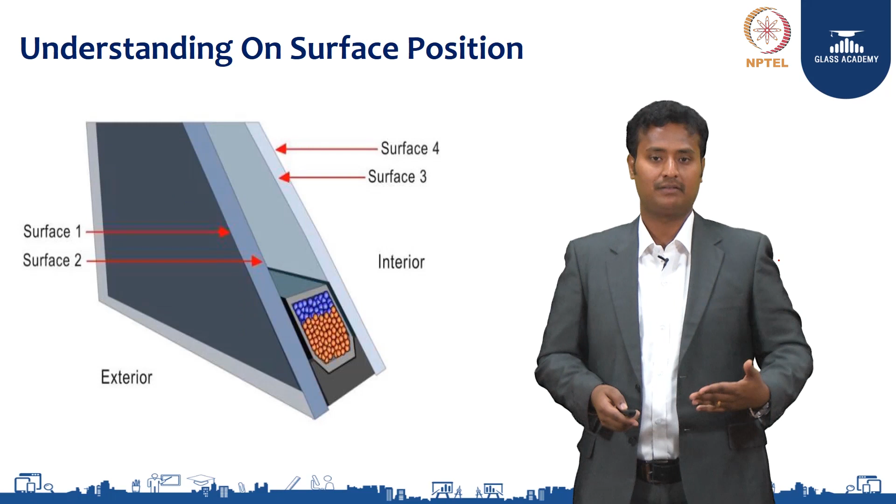So let us move on to this IGU part. Having said that, DGU plays a vital role in terms of acoustics, less condensation, aesthetics, energy conservation, and so on performance-wise. How does it help application-wise? Each part plays a major, essential, vital role in the IGU process.

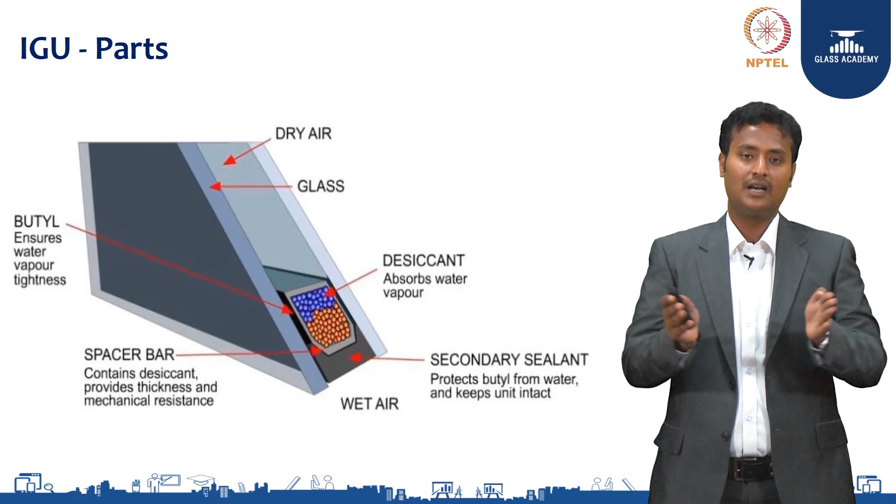Glass always has superiority for the IGU process, but even the other parts are even more essential for the IGU process. Which means you take two glasses hermetically sealed with the help of primary and secondary sealant, and you have an aluminum spacer which gives a space like 6mm, 12mm air gap, or 16mm air gap with 6mm glass. So basically it's a double glaze unit, glazed between the two panels, and either you can apply dry air or inert gas like argon, xenon, krypton, gases which give high thermal performance, can be inserted inside the DGU. At the time of processing you can do that.

And the aluminum channel, it's a hollow aluminum channel, has a desiccant. This desiccant gives a lot of performance effect to the glass. If the desiccant fails, your DGU is going to fail over a period of time, within a certain period.

For example, it's like a condensation effect, like a refrigeration system - nowadays in all shopping complexes, the refrigeration systems you see, there's a glass pane and inside there's refrigeration. Outside the temperature is like 30 degrees centigrade, inside will be like minus 20 degrees centigrade or less. So you get a condensation effect. In order to avoid the condensation effect...

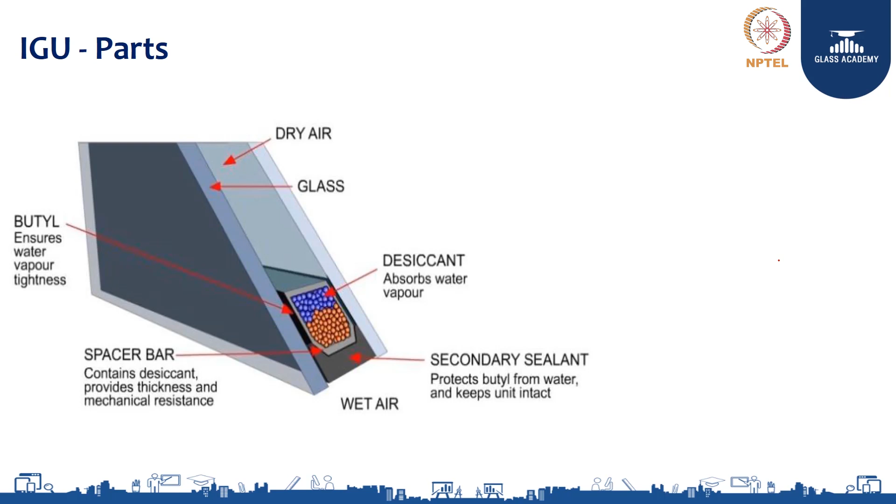This desiccant helps us to view the glass, view the product inside. It absorbs the water moisture at any point of time. So a single glazing has a U value of 5.8 watts per meter square Kelvin, whereas if you use a double glaze unit like 6mm, 12mm air gap, and 6mm, you will get a U value of 2.8. It can even be reduced further with the help of solar reflective coated glasses if you use them.

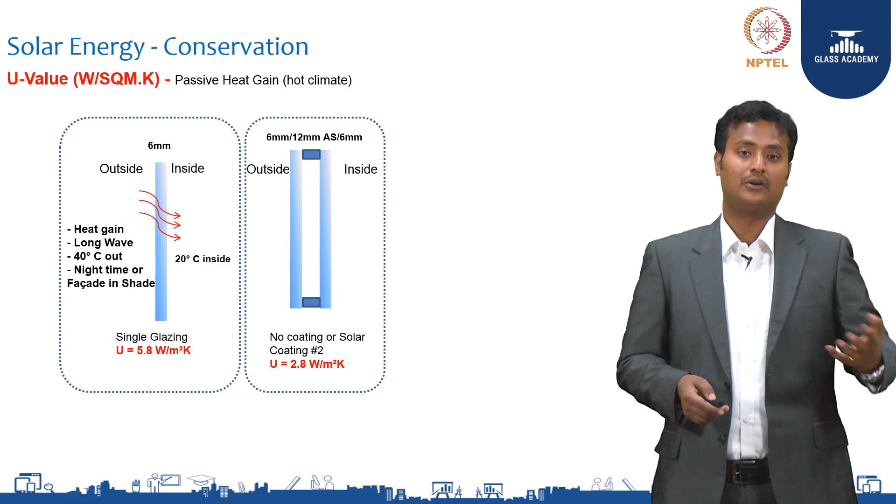Furthermore, the U value reduction you can get. For example, if you use triple silver or double silver coated glasses, you can get further U value reduction. The more the reduction of U value, which is 1.5 watts per meter square Kelvin, the more performance of the glass you will have.

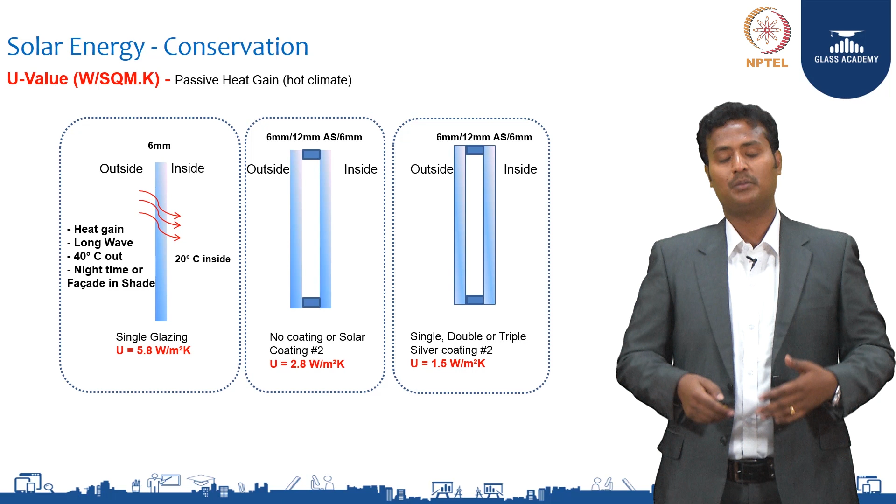The single pane has a U value of 5.8 watts per meter square Kelvin. Double silver, for example, if you take it, the U value of the double glaze unit is going to be 1.5 watts per meter square Kelvin. Thereby you have a profound energy saving you can get.

With single glass, you see 32 degrees centigrade allowed inside. If you use a double glaze without any solar control glasses, only a single clear glass, you will get a reduction of 6 degrees, down to 26 degrees centigrade. Whereas if you use 1.2 watts per meter square Kelvin as a double coated solar control thermal insulated coating, you get a reduction of 23 degrees centigrade, whereas it was 32. So you will get a considerable heat reduction inside the building.

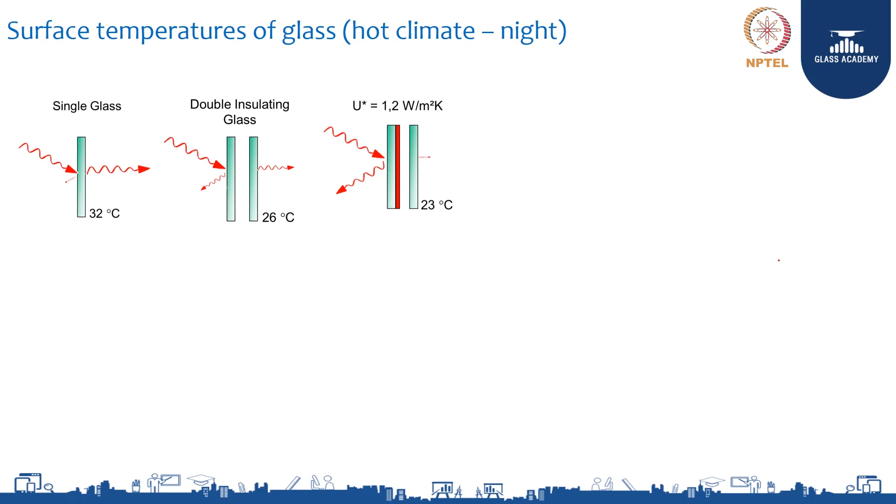So thereby you can save energy. This is the tabulation which we have talked about. So, benefits of insulating glasses.

First and primarily, it is aesthetically appealing in a facade. Nowadays, wherever you go in a metropolitan city, all the IT complexes are facade buildings. So basically you can see the amount of glass being used widely. The construction industry has been widely booming across the globe, so the glass occupies the most space, thereby you get the aesthetic feeling.

Earlier, ACP occupied that space. Nowadays, glass has occupied the space of the building. This is the facade, you get an aesthetic and improved comfort.

If you use solar and triple silver thermal insulated coating glasses, if you use double glazed, you can have great inside comfort. People can go and sit near the glasses, whereas if you use single pane glasses, you cannot go and sit near the glass.

You can achieve less condensation. We talked about the desiccant, which plays a vital role in absorbing the water moisture inside the DGU. If anything happens, it absorbs, so it will give you transparency as well as a less condensation effect. I would say there is no condensation effect.

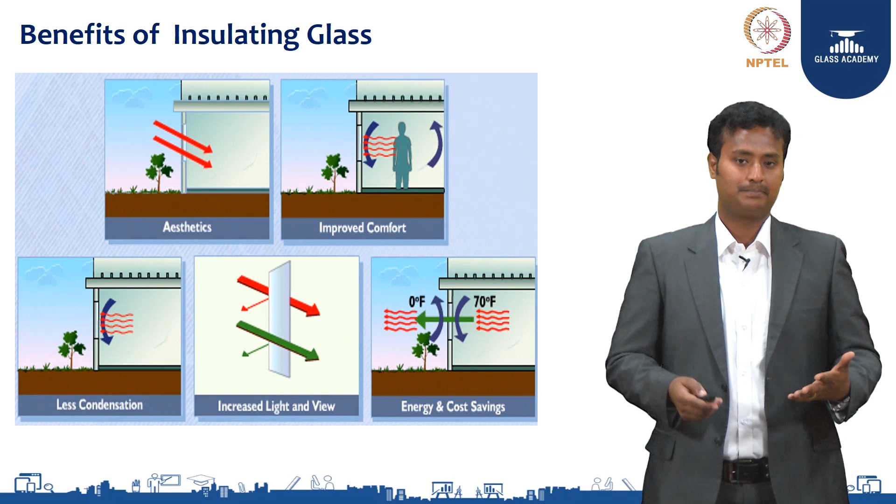Having said that, energy saving is the most important factor nowadays. Energy is a factor for all economical growth, so the amount of carbon emission has to reduce. The glass usage will give you a payback in a period of 2 years, thereby you can get a considerable reduction of your energy bills. So that's energy conservation we talked about.

If you want to use air conditioning in summer, the considerable heat coming inside will be reflected and stopped. It will not allow heat to penetrate into the building. So the glass will protect against heat coming from outside to inside, thereby giving you greater energy saving.

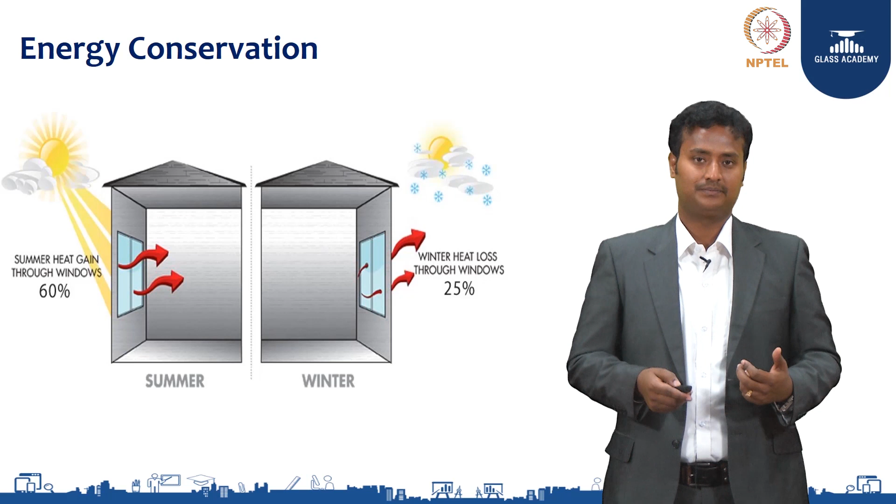In winter as well, the inside heat would not go away, it will retain that heat. Winter needs heat, so whatever thermal heat is produced inside, like from bulbs, laptops, other appliances, or body heat, that thermal heat will not escape through this glass. So you don't need heating, whereas in India we don't have heating technology like other European countries do, where if the room is colder they'll heat it. So again, we don't want to invest in heating the building when winter is on.

And perfect transparency is most wanted, people want to see outside. Nowadays, people using curtains, blinds, louvers, or any obstacles to viewing outside have a problem with this.

So you can choose appropriate glass, thereby you can see from inside to outside, and from outside to inside it can also select appropriate glass selections.

Acoustic performance, yes, you can definitely achieve this, because if you use a laminated glass with a DGU, you'll have more performance. With a normal 4+4, you'll have a decibel reduction from 70 decibels outside to 40 decibels inside. If you use a double glaze, 30 decibels has been completely reduced. It's quite an effective change on acoustic performance.

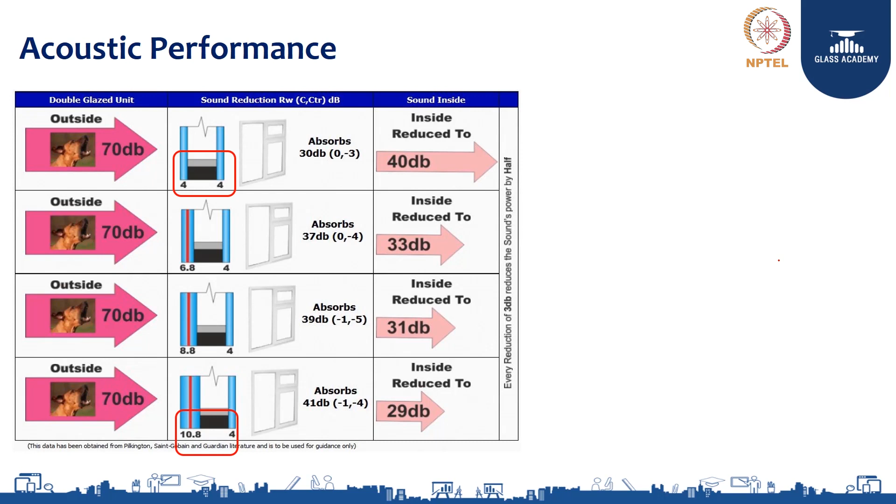Likewise, the more layers you increase of laminated panes, or the thickness of the DGU, you'll have a respective acoustic performance. It's widely used in hospitals and airports, where at take-off you'll have a huge blowing sound from the plane.

So the occupant will get disturbed, it's not a comfortable category, so you will not have a comfortable journey. In order to protect against that, the double glaze unit with laminated glass would ideally be helpful for such traffic areas.

It can be used in hospitals, where you want patients to be very calm inside. So you can use such a product to protect them from the outside.

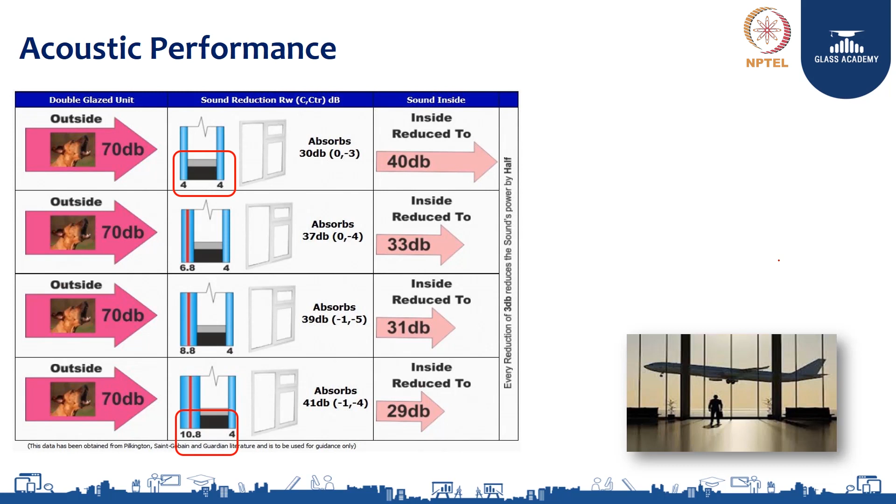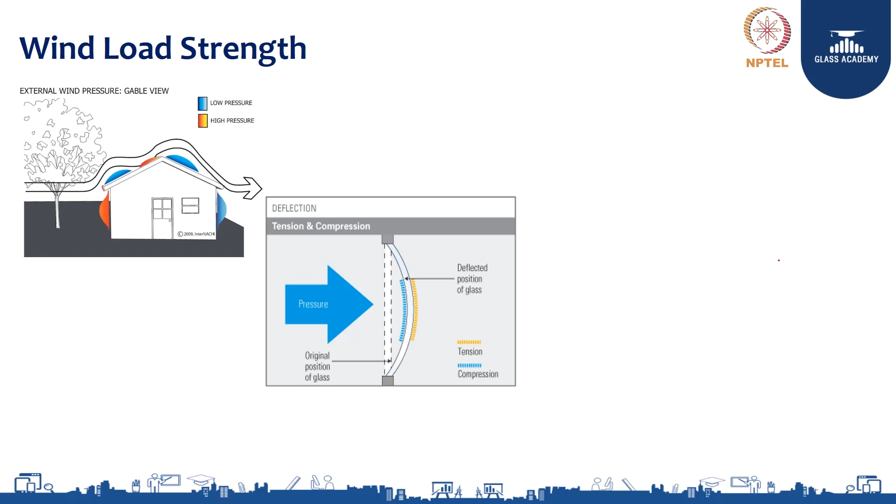Regarding wind load, yes, the glass will deflect since it's mechanically sealed. This deflection is allowed and it will return to its original position if you use a double glaze unit.

Application of insulating units includes architectural glass, facade, and residential application. You get a wider view through the glass. Earlier it was completely masonry and cement, but now you can see what is happening around through the glass. So it's widely used in facade IGUs.

You can do a number of colorings, either through ceramic, digital printing, or laminated PVB can be changed. So you can have greater color performance on your building, which you can choose with the help of IGUs.

Any shape, not only rectangular or square, can be done in any shape of the building, using the double glaze unit. So these are the common applications.

Skylight allows more light to pass from the top side to inside, so you need not use any artificial lighting inside. Nowadays it's very famous in India and European countries, they are far ahead in using such applications for skylights.

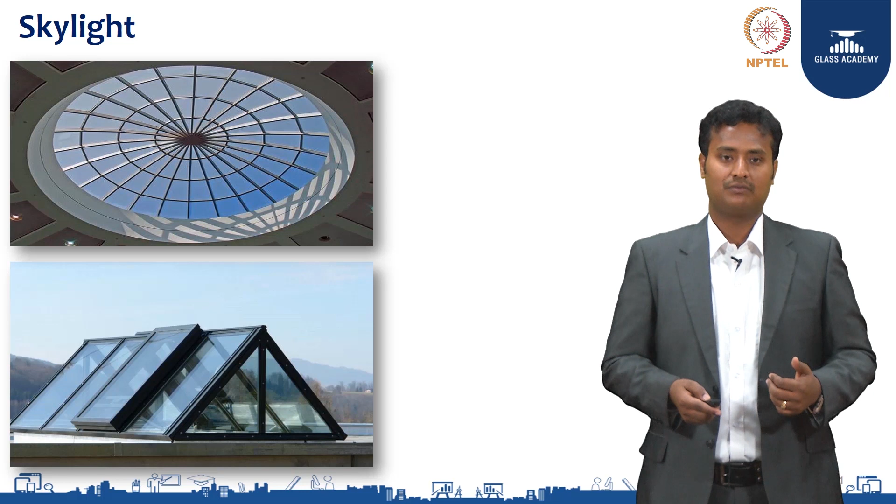Let's move on to laminated glass. Basically there are two panes of glass, fused with one or more layers of polyvinyl butyral sandwiched between them, treated subject to heat and pressure. The pane can be basic float glass, tempered glass, annealed glass, or heat strengthened glass - different types of glasses.

Processed glass can be sandwiched, comprising 2 or more sheets bonded and held together with the help of the polyvinyl butyral interlayer. That is the prime function of the interlayer, which has the capacity to hold together the 2 panes. It's nominally 0.38 mm thick.

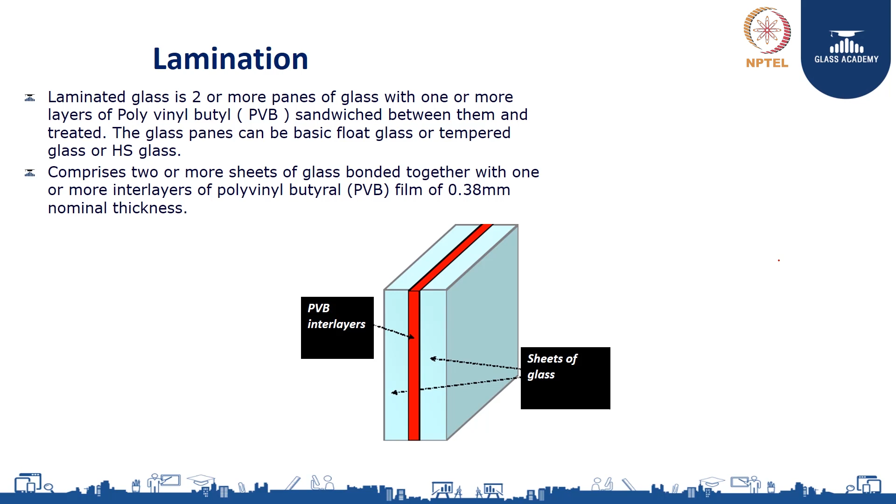This is the lamination process: loading, glass surface preparation, washing, and the nip roll assembly, where you have rollers, pressure chambers, and heaters where the glass and PVB are kept. It will be released from the nip roll process, and the air pockets will be sealed around the periphery.

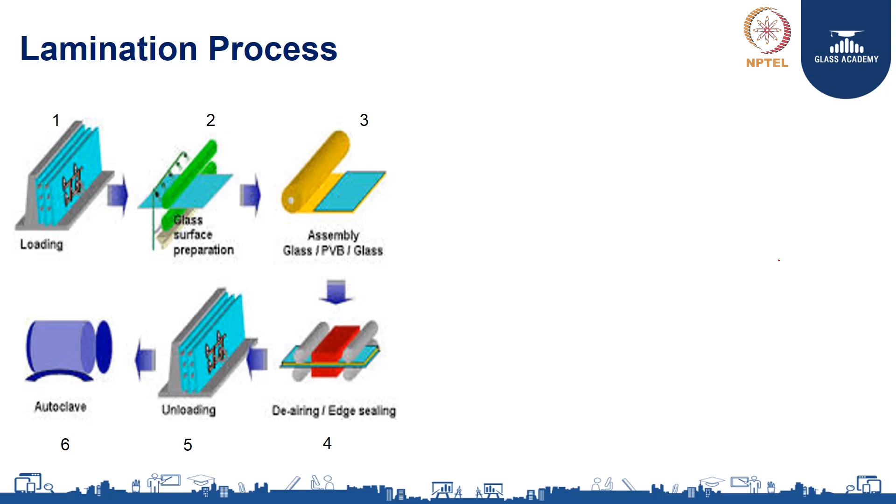It will be translucent. In order to get a transparent result, you will have to put it into the autoclave process, and that way you will get a transparent glass.

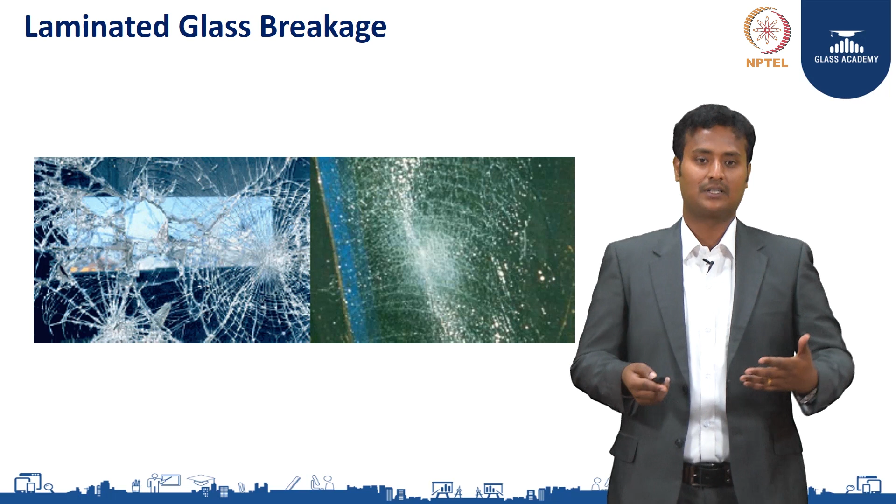So this is the fragmentation pattern of laminated glasses.

Benefits: safety and security, bullet resistance glass, cyclone and blast resistance, solar control, and UV protection. You can get 99% of UV protection from laminated glasses.

For example, if you use curtains or have furniture near a normal clear glass, they get faded over the year. If you use laminated glasses, you can protect your furniture near the glass.

Noise control, acoustic performance, you can get from laminated glasses. And safety combined with privacy, which is called privacy glass.

With a single click, this electrically operated glass has a film inside. If you apply energy to the glass, it will become opaque to transparent, or transparent to opaque. You can control it accordingly with laminated glasses.

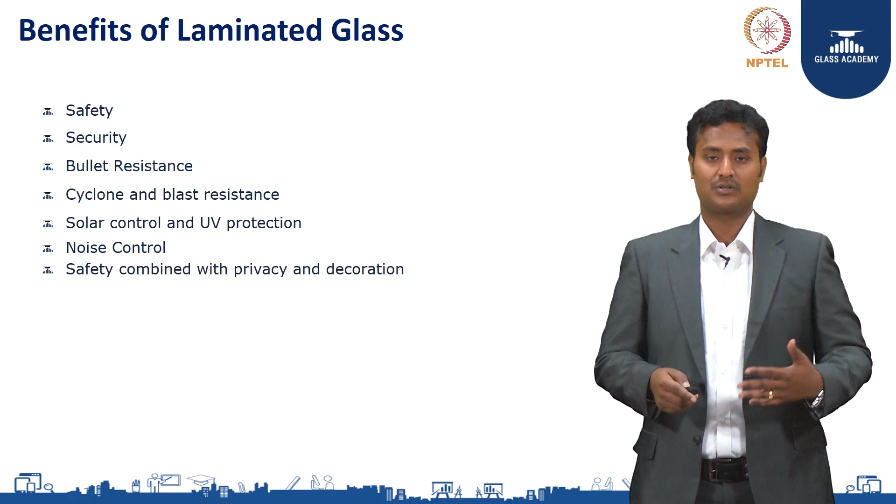For decorative purposes, you can laminate with paper, silks, photos, and many other things on laminated glass. This is the EVA process, ethylene vinyl acetate, which is basically for interior applications.

Next, we'll talk about printing on glass, basically with enamels, which are mineral paints, using several processes like screen printing, spray printing, roller coater, or digital printer. These are the processes used for printing on glass.

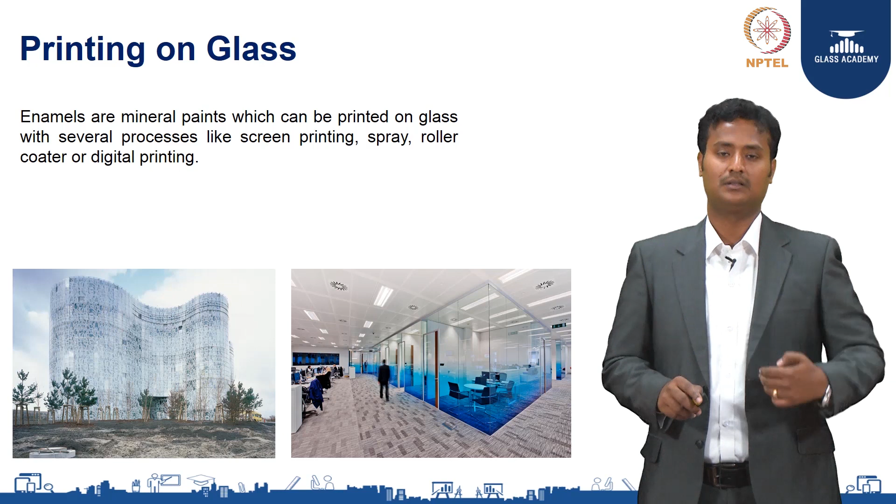Let's discuss screen printing first. It's nothing but a mesh like a screen fabricated with aluminum, with the periphery held in tight tension.

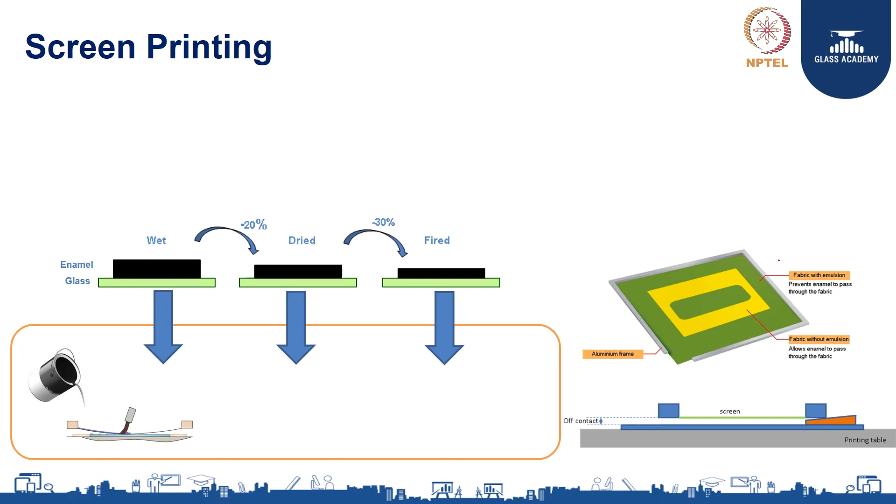You apply the paint, which is basically a ceramic glass flake mixed with pigment in proportions according to the thickness you want. You mix it and pour it on top of the screen, and the drying process happens. After that, it goes through a firing process.

Once fired, which is basically a tempering process, the coating gets fused onto the glass surface. People cannot remove it because the coating is deposited and fused onto the glass, creating a permanent bond between the glass and the coating surface through screen printing.

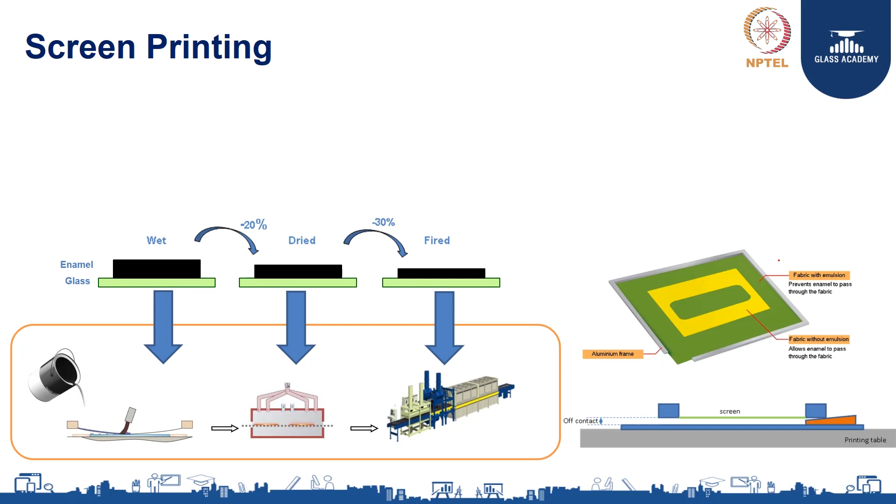You can create any dots or stripes based on the design of your silk screen to get the patterns. Next is digital printing on glass.

You can see the printing head on the machines and what it looks like in this picture. This is DPI, dots per inch. You can see these minute dots that have been deposited on the surface, allowing you to get an image on the glass surface.

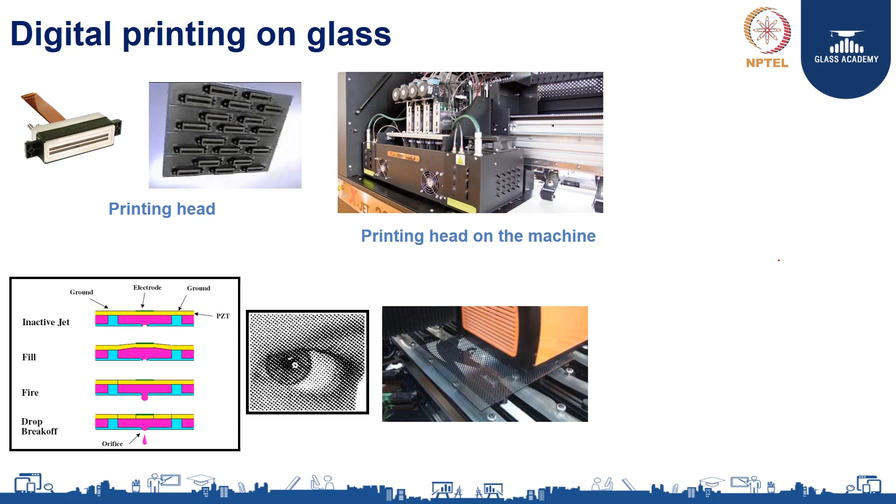Digital printing process: first, image processing. Whatever image you want to print, you keep it in the computerized system, which helps the printer analyze the image, determining resolution percentage and color percentage to be given to the print heads. This image processing is taken care of by the computer software.

Glass preparation is most important. It should be free from dust, fingerprints, and other residue on the surface for printing. Otherwise, effective printing would not be possible.

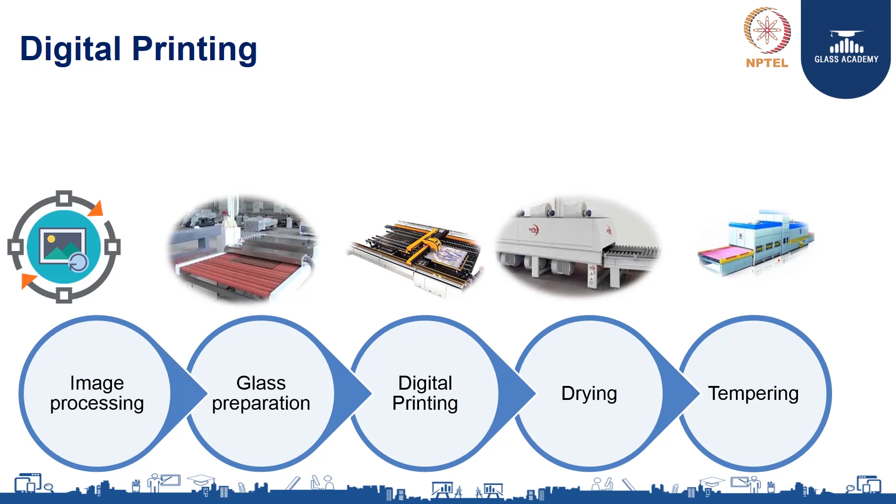Next, let's talk about frosting. Frosting is of two types: sand frosting and acid frosting.

Sand frosting uses a vertical machine where you load the glass. This machine has a header with many orifice nozzles through which sand is pumped, giving you surface roughness.

Wherever you want to eliminate the roughness, you can apply a polyvinyl film on the surface, so those areas are protected during the application process. This masking effect with polyvinyl lets you achieve any design you want.

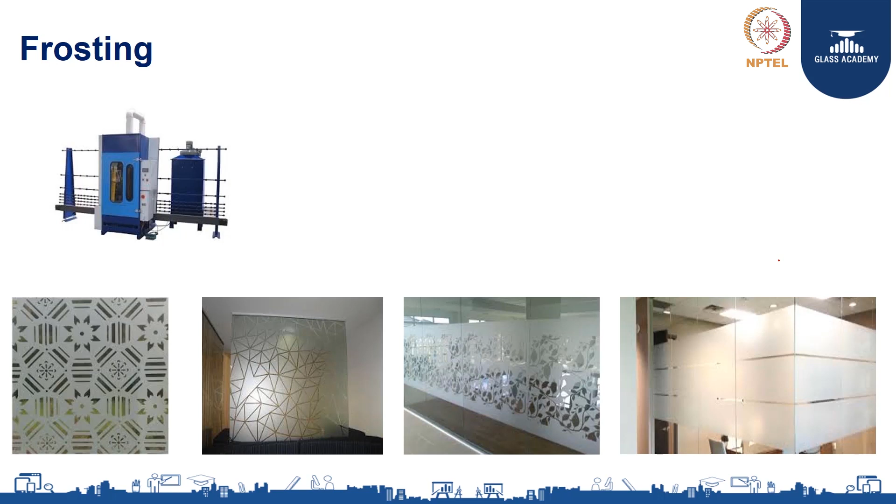Next, a frosted appearance may be given to the glass by covering it with a mixture involving acid and magnesium sulfate, poured onto the glass surface. When the solution dries, the magnesium sulfate crystallizes into the glass, giving you the frosting effect.

Sand frosting has a very rough surface, whereas acid frosting is not rough, but the finishes look identical. You can see the application pictures below showing both acid frosting and sand frosting.